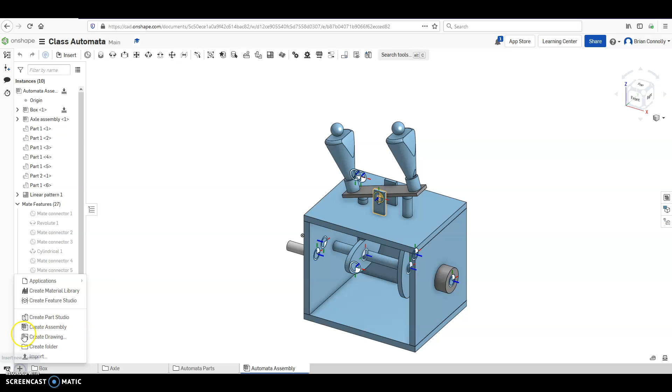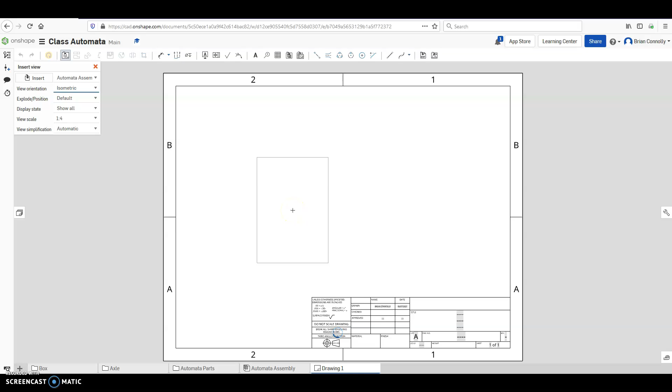So here I'm going to open up and create a new drawing. ANSI A inch, we'll go there. As it loads, remember, the first view is just going to be the full-on assembly as an isometric. This doesn't necessarily have too many conventions attached to it, but it is nice to have the isometric there whenever you're making a project. If you want to, you can show the shaded view because isometrics are there just as a pictorial to show you what it looks like. Generally we don't show hidden lines and we don't put dimensions on there.

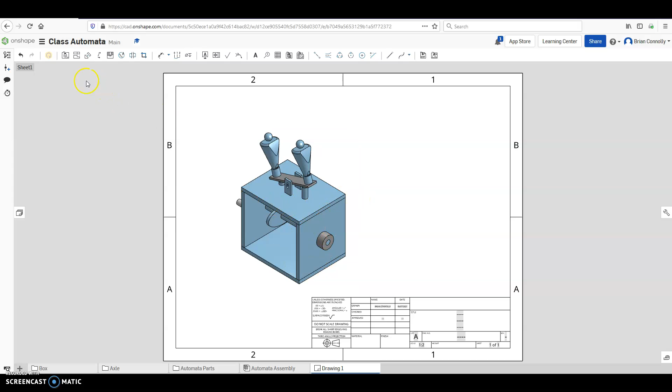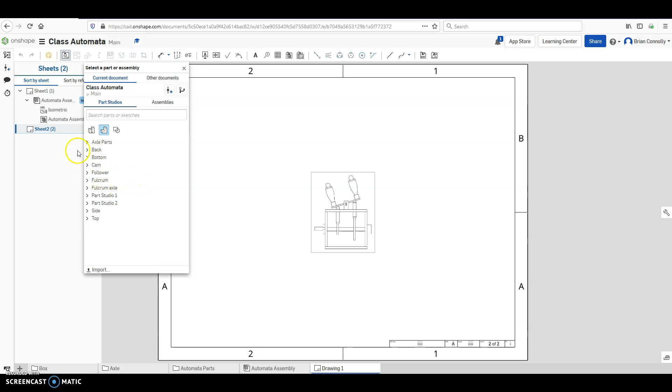In addition to that, obviously we are going to use our bill of materials. Again, in another video I've already shown that portion of it. Next, I'm going to create a new sheet, and I do suggest this. By creating a new sheet within this window, you will be able to export all of these as one file, and it's very helpful to do that. So I'm going to insert a view. I'm going to make sure I'm getting a part, and I'm going to start on part 3, because it's fairly complex and will be a good example. Okay, so I've got part 3.

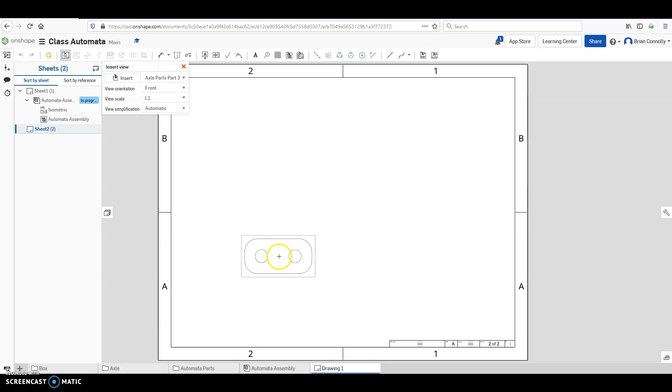From this view, it looks fairly small, so I'm going to make this bigger. This view scale doesn't have to be something specific, but I might pick 1.5 to 1. There we go. I'm not going to use the view the computer says is the front, because if I were to use that as my front view, I can't really tell what's going on there. I don't understand the shape. I don't know without hidden lines if there are holes in it, and even if there are, whether they are square, round, or some other shape. So I'm not going to pick this view.

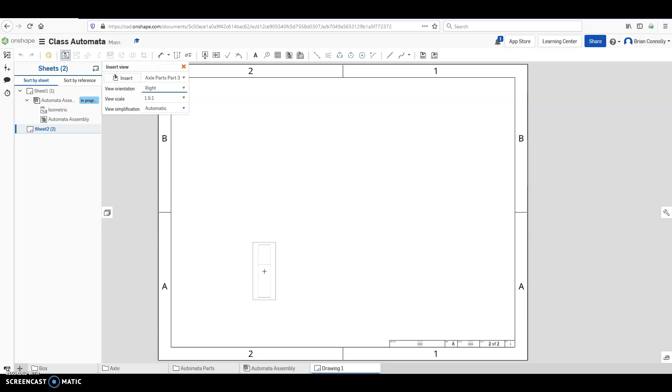I'm also not going to pick this view because, again, it looks like a rectangle. It might have some rounded corners. It might have ones that are at angles. Chamfers is what we call them. I can't really tell. But if I look at this view right here, I can see that it is essentially a rounded rectangle. It has a couple holes in it, and those holes are circular. That tells me a whole lot about this part.

The next thing that we try to do is have the longest dimension on this view. And right here I can see that the longest dimension is there. It is also horizontal, which is kind of a preference as well, because our paper is horizontal, and it makes more sense to do it that way. So this is going to be my front view. It describes the part the best. It has the longest dimension. It looks like it could sit there, in a pretty natural position. And so this is going to be my front view.

The other thing is, and you can't really tell because this is symmetrical, I also want to be thinking about what those other views are going to look like, and can I avoid hidden lines as much as possible. We can't dimension to hidden lines. We want to avoid them if at all possible. With this one, it doesn't matter if we rotate it to the right or the left. It still is going to show the same amount of hidden lines, not only in the front view, which is hopefully few, but also in the right hand side view.

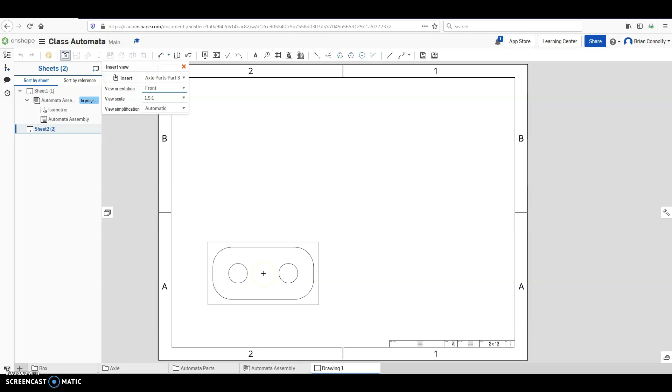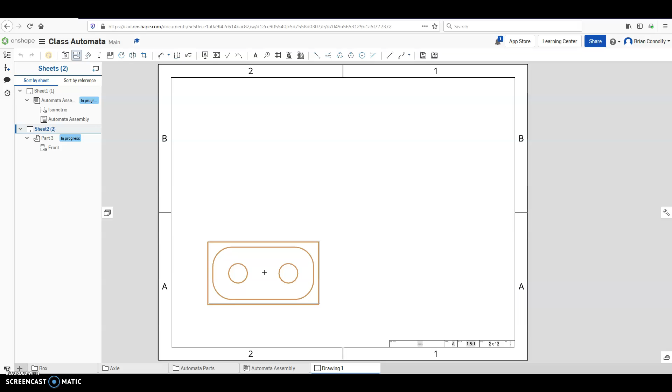The front view goes into this bottom left quadrant, and we're going to leave a little bit of space around it because we want to make sure we have room for dimensions, that it has some room to breathe. We want this to be clear and easy to understand, so it's not too close to anything else. Okay? So I click there, I've got my front view, and automatically Onshape and most CAD programs are going to give you what's called a projected view. A projected view is a view that aligns with it as the orthographic projection is supposed to.

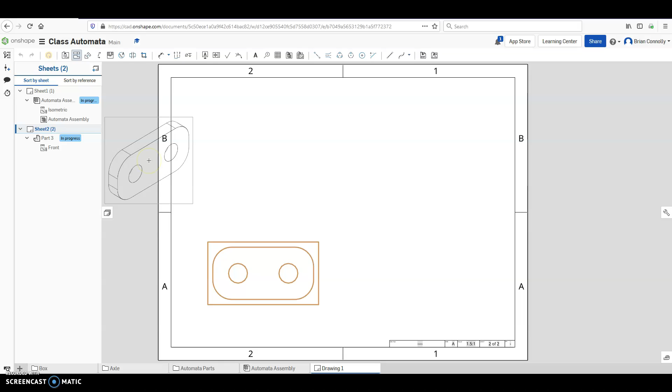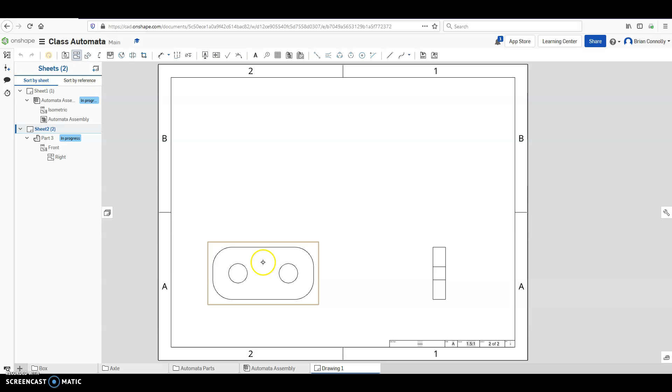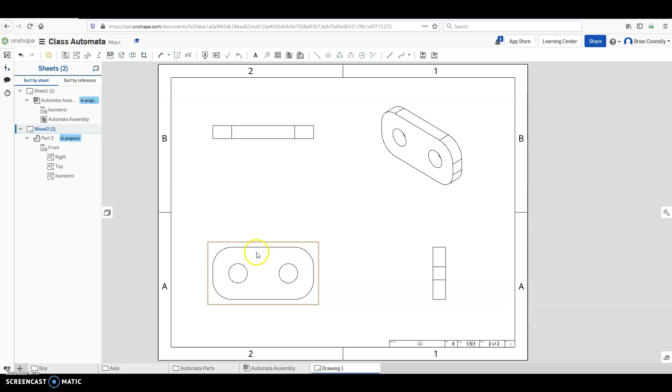If we go diagonal, this is the view that would be our isometric in that corner. We're not going to do that. We're actually going to put the right hand side view right here, and you can see that it lines up. I'm still in that projected view tool, so I'm going to click and give us that top view, though we may get rid of that one. We will see. And then if you want, you can have an isometric. If you don't, that's totally fine as well. Beginning CAD classes tend to have the front, the right, and the top.

Generally, that's how we do it. Now, if we look at this, I can see that this shape is essentially here. It's got a couple rounded rectangles, a couple circles, and then it's a certain thickness. And that's about it. There's nothing that this particular view shows me that these two views don't already show me. So that tends to be where we take one of these views and we get rid of it.

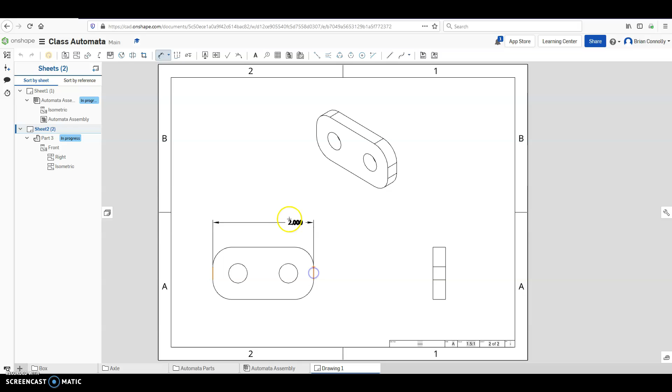Then we can also move this isometric kind of towards the middle. This allows us to have a balanced page. It's not too full of things and it's not too empty of things as well. From there, I'm going to put dimensions, and the first thing I like to do is put the overall dimensions, and I'll often move them up here. I'm going to put mine up a little bit, but I may move it down a little bit.

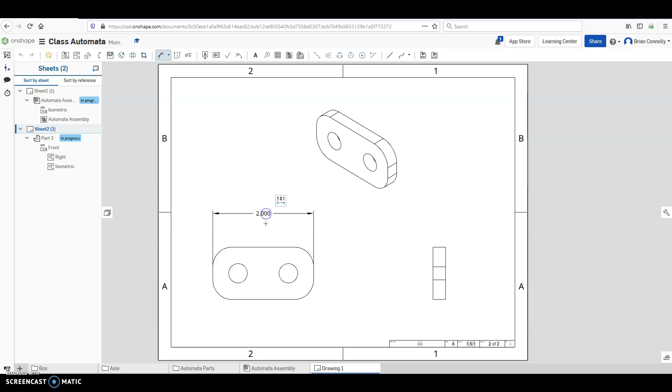The dimensions, the numbers themselves, should be centered between those arrows, so along that line, and we want to make sure that our dimensions, whenever possible, and it usually is, are off of the part. So we don't want to put it here, it's just a little more confusing. We want it to be off of the part. In addition, I'm going to do the overall height. We work in 3 dimensions. So we've got the width, the height, and then the last thing is the depth.

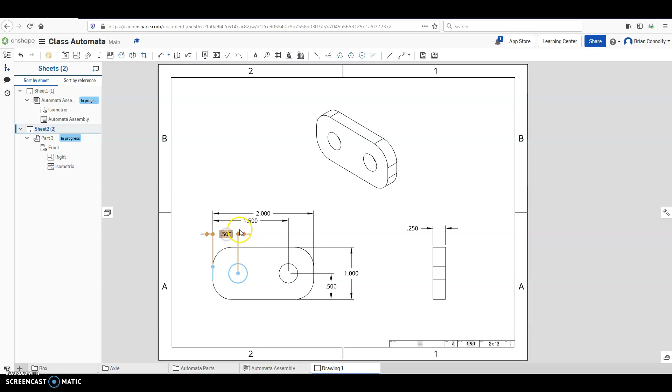From there, we can actually dimension the location of these holes. So we've got one that's a 1/2 inch, and they both line up. So I'm just going to put the one, and then the width here, and I can actually put one from that edge over here as well. Now it looks like I've got a little more space than I need here, but I have pretty good spacing along here, so it's actually not too bad. So that's going to be good dimensions right there.

Two last things. We've got a rounded fillet right here, and I think this is small enough that we don't need center marks. And then we also have a couple holes. So I'm going to check and see, does my hole callout, and sometimes it's in the drop down menu, but it's right here on my screen right now, does it allow me to dimension? And it doesn't, so that's okay. We'll just put in a dimension and I'll show you how to change that as well.

So we've got a hole, and generally what we want to do is also define the depth, how far down it goes. This one goes all the way through, so that's THRU. Other times we'll put in symbols as well, but if you have a hole that is more unusual than that, then you would probably be using the hole function anyway.

Another thing that is very helpful, I'm going to put this right here, is that there are actually two of these holes that are exactly the same, and so we can put what's called a quantity note. So I'm going to put a 2, a capital X, and then a space just because I like a little bit of space to make it easier to read. And so now I know by reading this that I have two holes that have a diameter of 0.375 and they go all the way through. There we go. That is fully dimensioned, but we're not quite there yet.

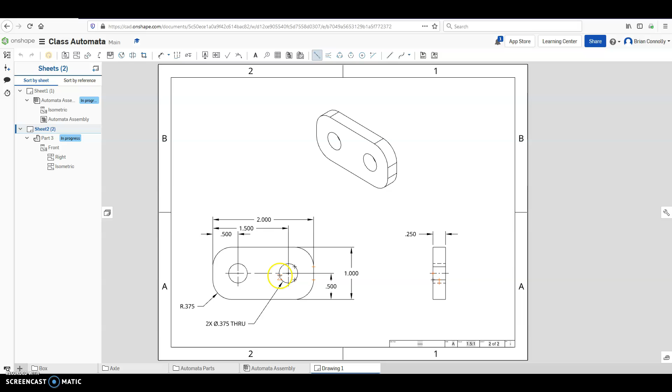So long, short, long, vertically this way, and then I can also do the same thing over here so that with that center line, it's very clear that it's cylindrical from this view. So there you go. That is fully dimensioned, I know exactly where everything is. I've got center lines on all the circles. I have defined the size and location of everything. My front view is the most descriptive. It has the longest dimension, fewest hidden lines, and seems like it's in a natural position. That is in that bottom left quadrant.

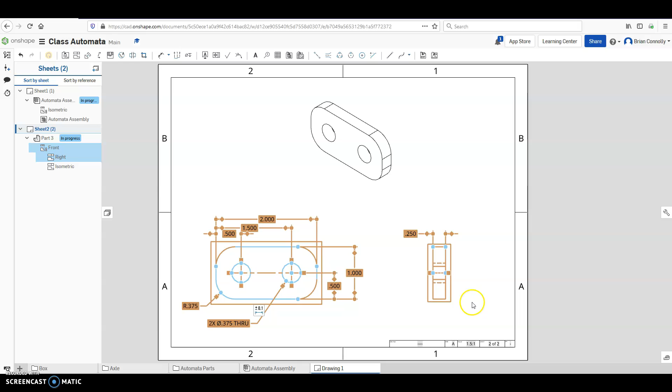My right hand side view lines up with it, and so just to show you, once I move this, this should move. That projected view will do that for me. The isometric is nice, but again, not required. And so if you don't have that, that's fine. But I definitely am looking for your drawings to have dimensions and have them line up in this way. And then to have that front view be in this kind of fourth of the page with all of your other views aligned to it, so your right hand side and top if needed.